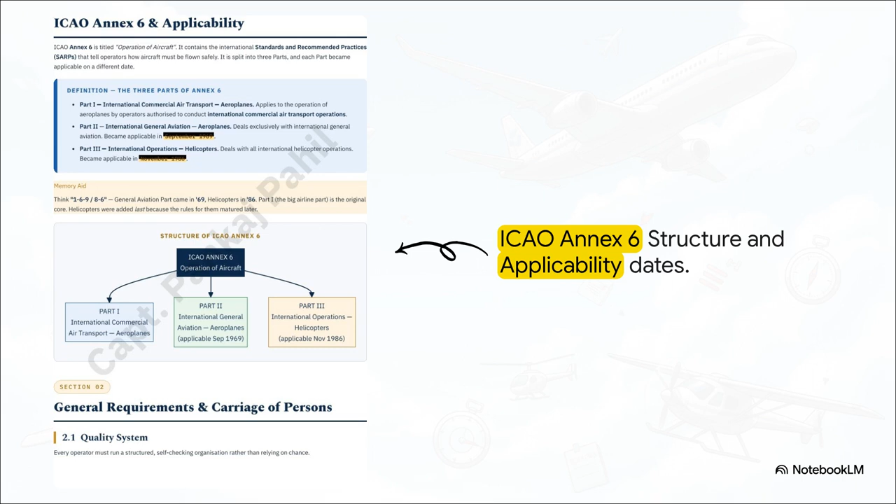This is a massive exam tip memory aid for you. Think 169 and 86. General aviation applicability started in September 1969, and helicopters followed in November 1986. You really need to memorize those exact dates because examiners absolutely love testing your precision here.

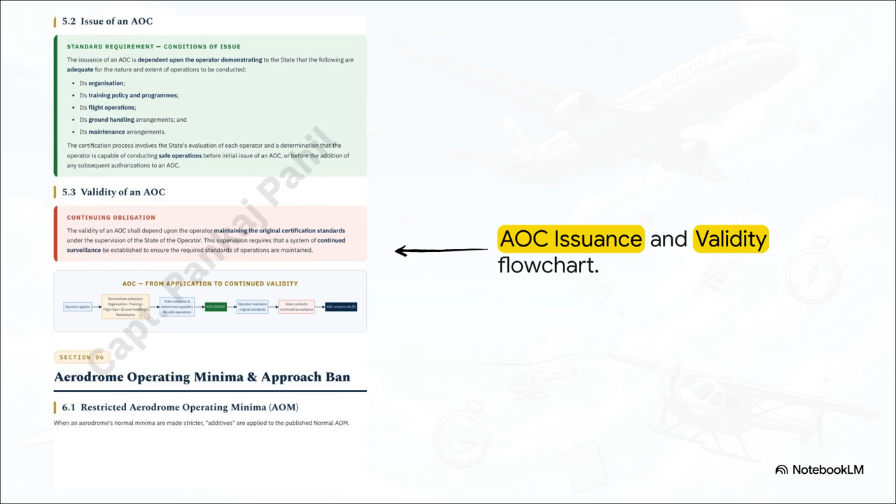Okay, let's shift gears to Section 2, Flight Duty Time Limitations, or FDTL. Listen, pilot fatigue management isn't just some HR policy. It is absolutely crucial for operational safety and is heavily tested on your exams. The really important takeaway here is understanding exactly how maximum hours are applied.

So for a standard 2-pilot op, your maximum flight duty period could be 13 hours if you're only doing 1 or 2 landings. But that number drops significantly if your ops start creeping into nighttime.

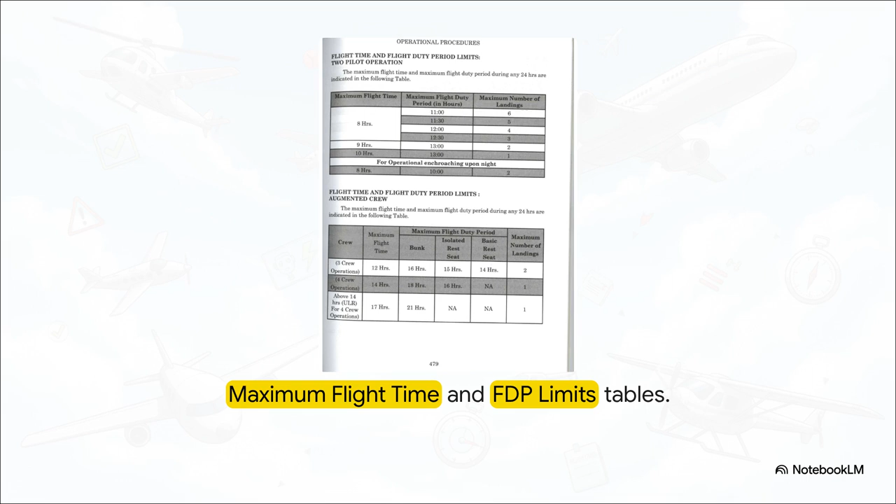Now, take a look at the bottom half regarding augmented crews. By bringing along an extra pilot, crew members can take designated in-flight rest. This is what allows us to safely and legally extend our maximum flight duty period.

Let's make sure we lock in this next DGCA exam tip. The rule is actually pretty simple: better rest facility equals longer FDP allowed. A bunk, which is a proper lie-flat bed, always gets you the highest flight duty period. A step down from that is an isolated rest seat. And down at the bottom is a basic rest seat, which gives you the absolute minimum extension.

You need to pay close attention to this strict limitation. A basic rest seat is totally restricted, as in not available, or NA, for 4 crew or ultra-long-range operations.

Moving right along to Section 3, Aircraft Performance and Equipment. We're getting into the technical heart of this explainer now, determining if an aircraft is actually legally fit to fly. Let's break down dispatch reliability by tracing the path from the manufacturer all the way to you, the pilot in command.

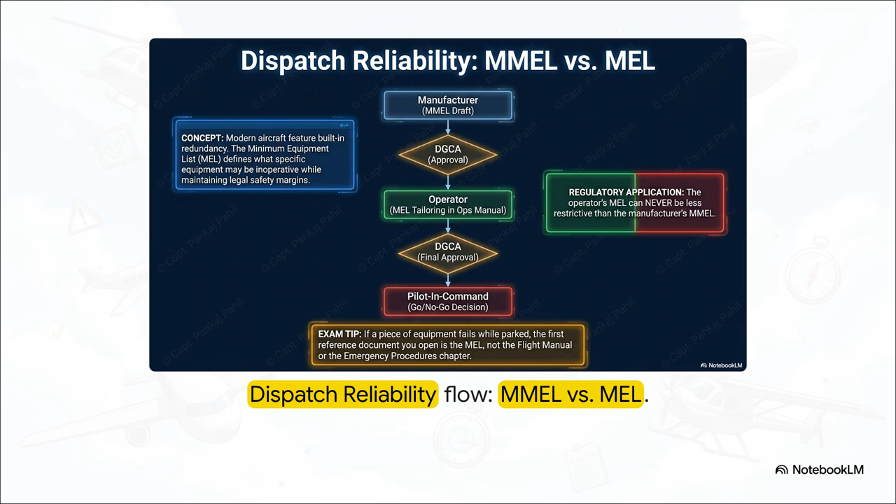So if a piece of equipment fails while you're sitting at the gate, the MEL is literally the first document you open to make your go or no-go decision.

Now, how does the MEL contrast with the Aeroplane Flight Manual, or AFM? Well, the AFM contains the certified performance data established by the state of design, which factors in variables like mass, runway slope, elevation, temperature, and wind.

I want you to read that red limitation box very carefully. You must operate strictly within AFM limitations. Guys, these are absolute legal boundaries. They aren't friendly suggestions. You simply cannot negotiate with physics, and the DGCA expects you to know this intimately.

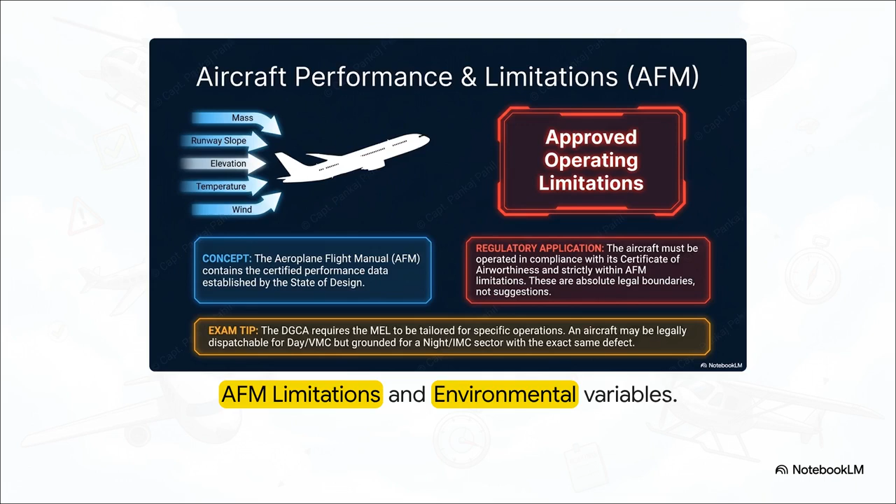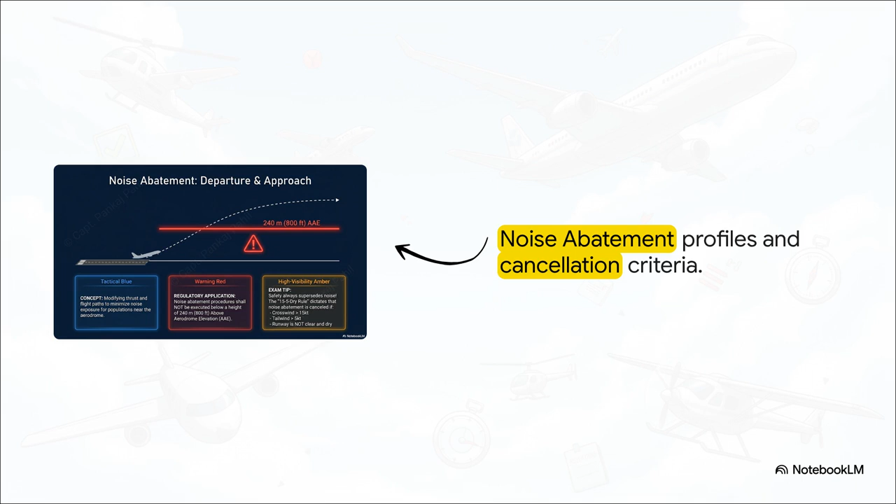The 15-5 dry rule tells us that noise abatement is completely canceled if your crosswind is over 15 knots, your tailwind is over 5 knots, or if the runway is anything but clear and dry.

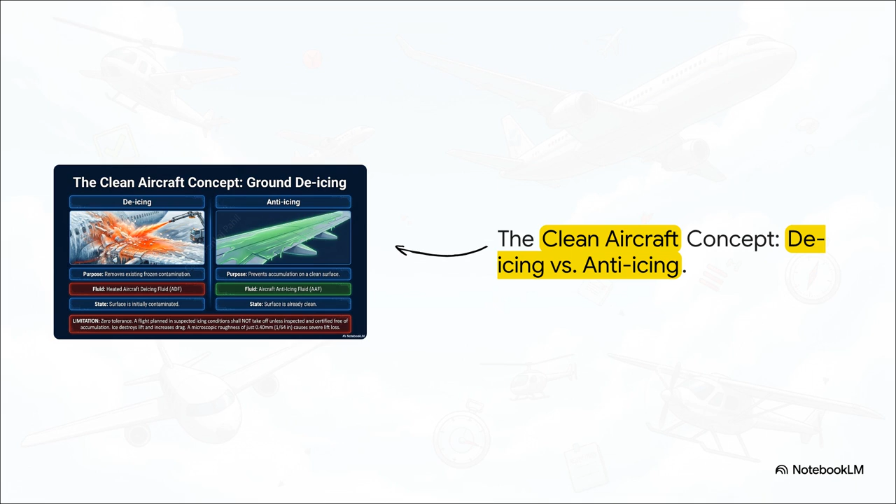Look at that red limitation at the bottom. It's uncompromising. Even a microscopic frost accumulation of just 0.40 millimeters is enough to cause severe lift loss. Bottom line, you do not take off unless you are 100% certain those wings are completely clean.

Let's push forward into Section 4, Meteorological and Runway Hazards. We're talking about invisible atmospheric killers and severely degraded runway physics here.

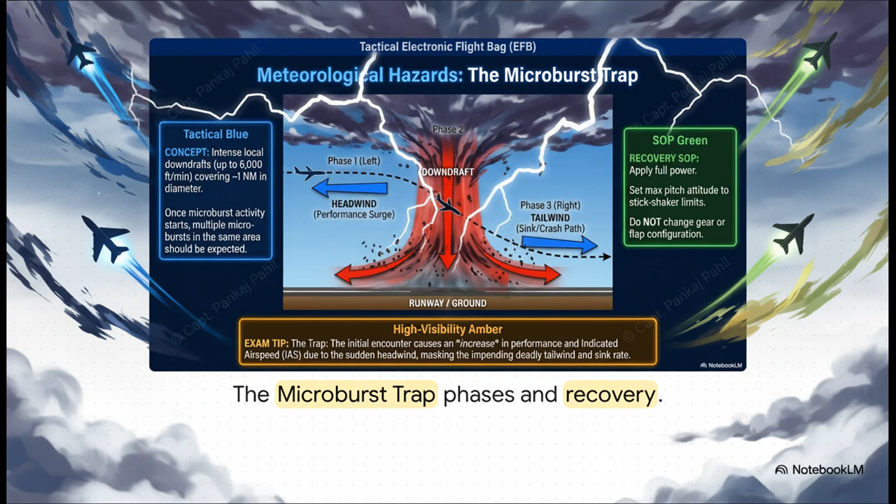As you first enter it, you get slammed with a sudden headwind. Now, this causes an artificial temporary surge in your performance and airspeed, which dangerously masks the massive downdraft and tailwind that follow instantly after. If you ever get caught in this, you must firmly dictate the green standard operating procedure recovery steps: full power, pitch up to the absolute stick shaker limits, and absolutely do not touch your gear or flap configuration. Right, let's analyze wake turbulence.

These are basically invisible, horizontal tornadoes that spread out from the rear of the wings and sink down about 1,000 feet below the flight path. Here is a massive amber tip for your exams. A heavy, clean, slow configuration is what produces the absolute maximum wake turbulence.

Tactically speaking, the deadliest weather scenario you can face is a light, quartering tailwind while landing behind a large aircraft. Why? Because that specific wind keeps the upwind vortex parked right on your runway centerline. To combat this, we use incredibly exact, minute-based longitudinal separations.

You've got to look closely at these amber boxes because examiners love setting traps here. Say you're in an arriving light aircraft landing behind a super heavy A380. The strict wait time is 4 minutes. But if that same light aircraft is departing on the same runway behind a medium aircraft, the requirement is only 2 minutes. You really need to memorize this matrix completely. This time separation is what allows those lethal vortices to safely dissipate.

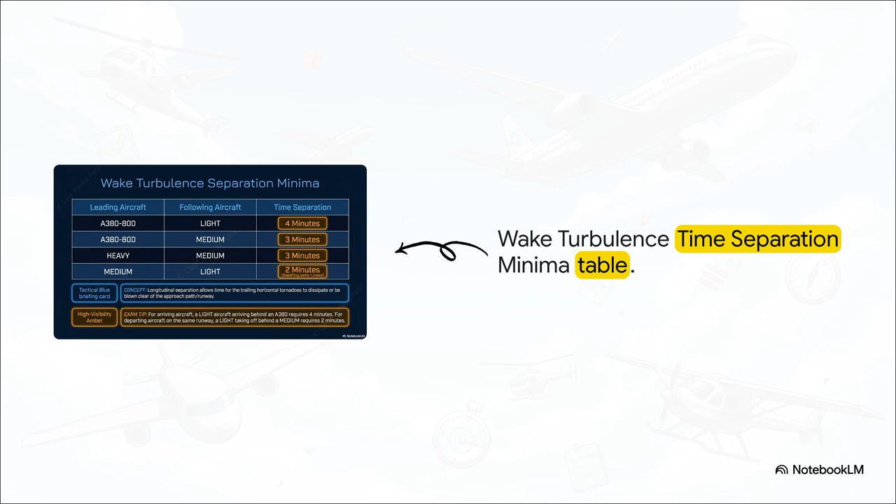Once you do safely cross the threshold, you've still got to deal with runway contamination. And in aviation, precise millimeters matter. A damp runway has moisture on it, but it isn't shiny. A wet runway is shiny, meaning it's covered with water that is less than or equal to 3 millimeters deep. Now, a contaminated runway means you've got standing water greater than 3 millimeters.

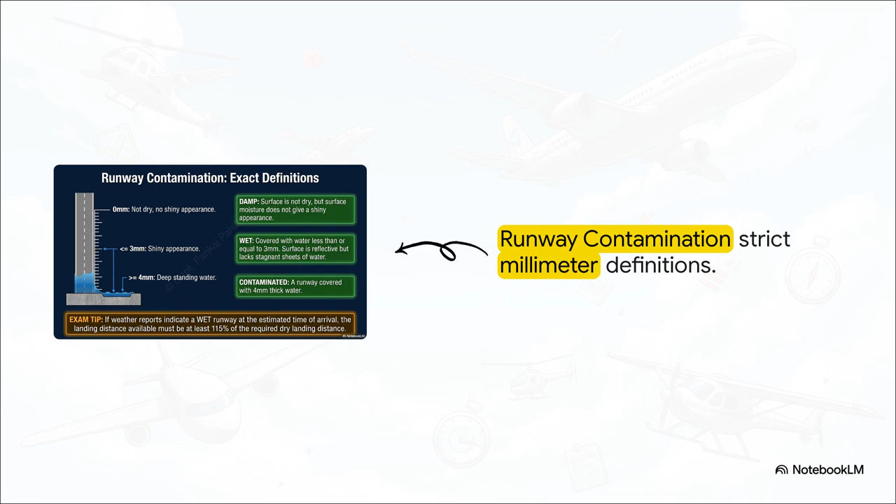You need to apply this high-visibility amber exam rule. If the weather reports wet conditions at your ETA, the landing distance available must be at least 115% of your required dry landing distance. So, why is that 115% rule so critical?

In a word, hydroplaning. The blue concept box here describes dynamic hydroplaning, where high speeds and standing water physically lift your tires completely off the runway, which totally wipes out your directional control and braking action. Viscous hydroplaning is a bit different. It barely needs any moisture, just a smooth, dirty surface.

So, what's your green SOP application here? It's relying on your anti-skid braking systems. They prevent wheel lockup, letting you apply aggressive brake input safely so you can brake right through that layer of water.

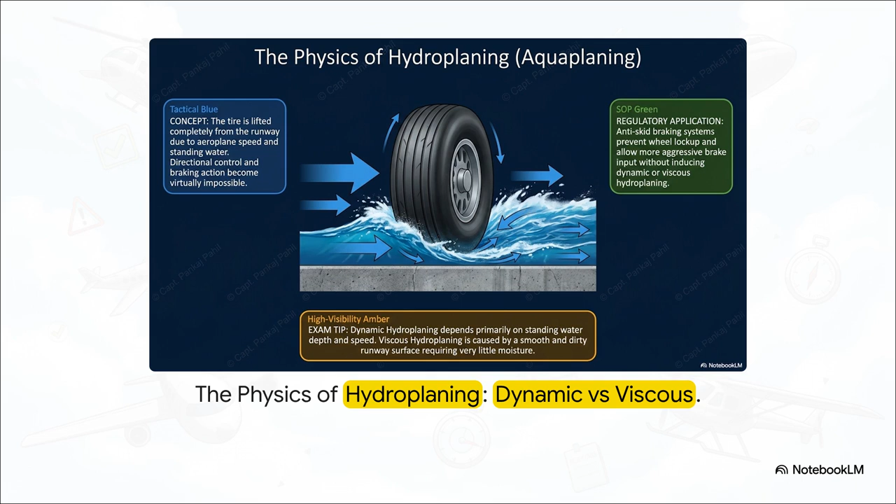All right, we are entering our final module, Section 5, Managing In-Flight Emergencies. This section demands total 100% memorization of fire classifications and pressurization protocols.

Let's start with the fundamental physics of fire. It requires a chemical chain reaction between oxygen, heat, and fuel. We call this the fire triangle.

We systematically break down the classifications in these green operational blocks. Class A fires involve ordinary combustibles like wood and paper. Class B covers flammable liquids and fuels. Class C is electrical equipment. And Class D involves really dangerous flammable metals like magnesium and lithium.

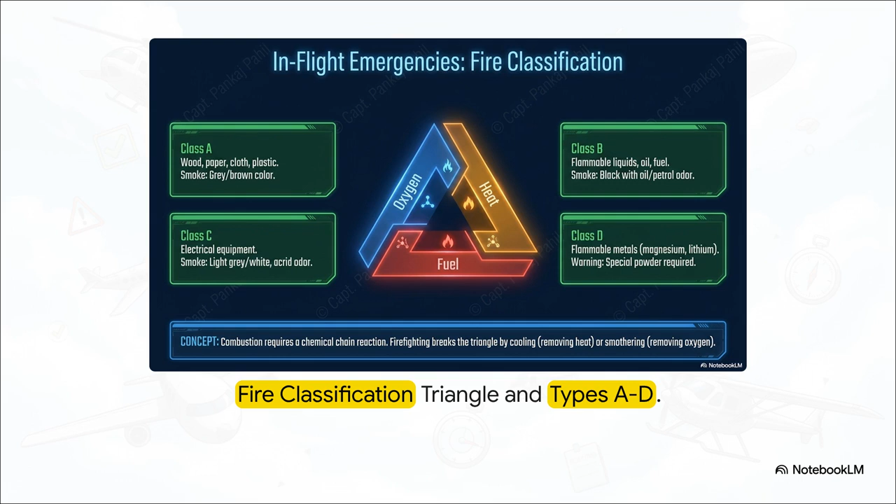To fight a fire successfully, you have to aggressively break that triangle by either cooling it down to remove the heat or smothering it to choke off the oxygen. But you have to match those fire classes with the correct extinguishant, and that is a life or death decision.

Finally, let's wrap up with cabin pressurization and rapid decompression. A rapid decompression happening in under 0.5 seconds is going to cause fog, flying dust, and an instant sub-zero drop in temperature. Your time of useful consciousness at 35,000 feet, it's measured in mere seconds.

So, let me leave you with this provocative final question. You might have the regulations memorized, but when the warning horns suddenly sound at 35,000 feet, do you actually have the discipline to execute them?